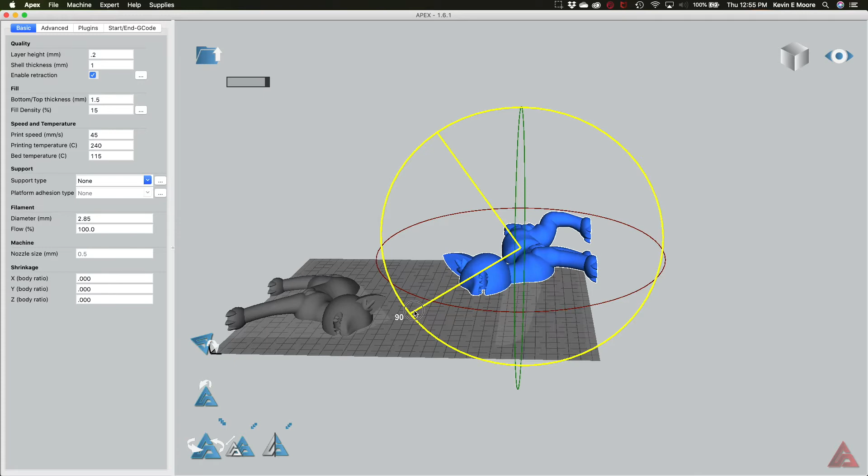And then we're going to do the same, rotate it 90 degrees. Okay? And then we will click and move these around together so that they both turn the optimal color for knowing that they're fitting on the build plate.

And then I'm actually going to rotate them a little bit to make them closer together, just so that they don't have to go so far from one another in order to make its travel moves. Okay.

So there we go, we've got both objects on there. And then we want to always make sure that we have supports on.

So if I click on support type, nothing's happening, but weird with the Mac software. If I maximize this, come down here, click on Apex, and then click on this and go touching everywhere. Over here, we'll go to overhang angle.

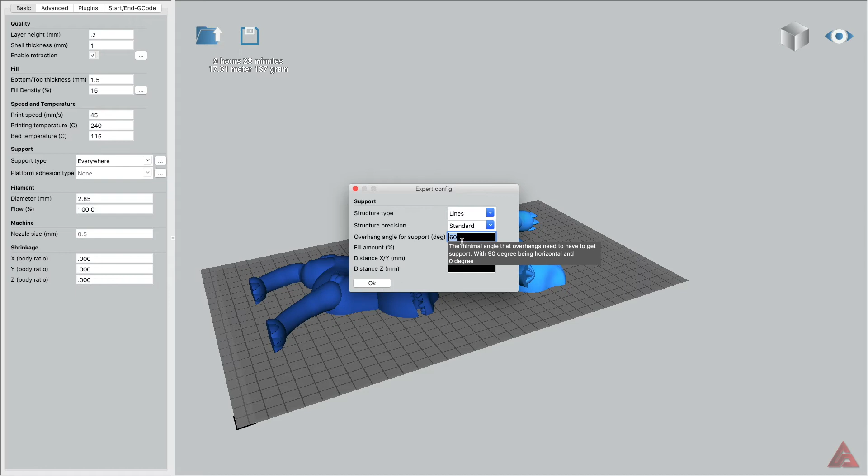Mine's in dark mode, so that messes this up too. The software is a little glitchy, but I can have this, 45 is a sure thing, but I leave mine at 60 usually, and it comes out all right. Just depends on the print, but 45 is a sure thing. And that's the degree of the angle that's going to get the support structure.

Okay, so now let's look at it in the layer mode, just to check everything, making sure it looks okay. So if I scroll through all this...

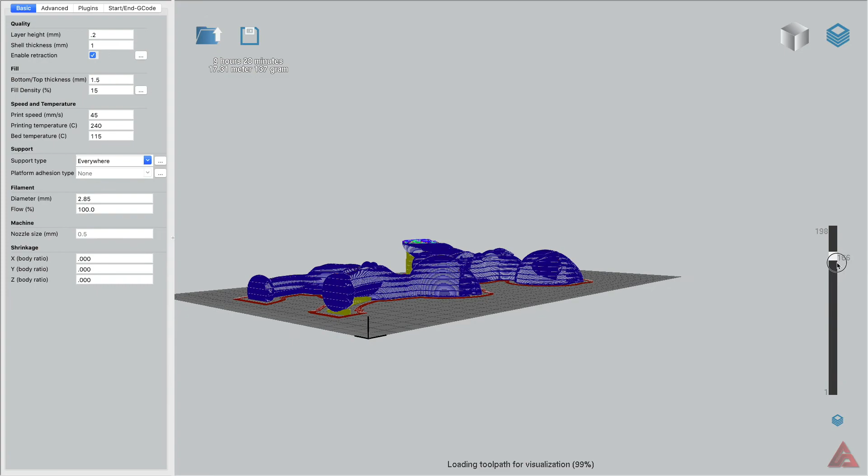Most of this is on the video of how to print with the Apex software, but it's good to go over it again. So you can see the yellow here is going to be our support structure, and we go all the way down to the bottom layer.

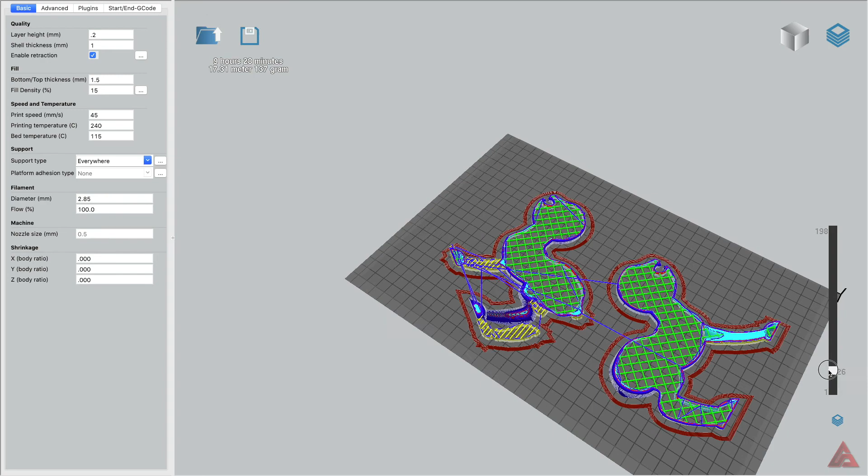Every time we always want to go to the bottom layer just to make sure we've got a nice solid bottom pattern, which it looks like we do.

And then we're also looking at the honeycomb pattern. Can we get away with making it thinner, or is it the optimal density? And I think with this one, it's pretty good. I mean, I might be able to get away with making it 12 or something like that.

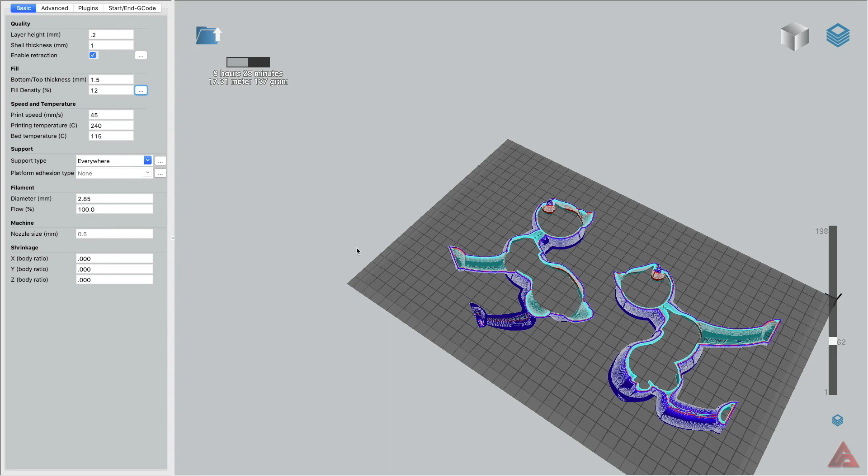So 12 will give it a little bit quicker print time. And change this to 1.25. So we're cutting off a little bit of time.

So I think this is probably going to be what we want for our printing purposes. This is good settings, it looks like. And we're ready to go ahead and start our print.

So then after this goes all the way across, it tells us we've got 8 hours and 39 minutes, and we'll go to Save Toolpath.

Save it as cat, just cat, or whatever you want to save it as, so that it makes sense. A shorter file name is always better, because I can see it on the display on the 3D printer easier. So click on save, and that's ready to just put on a thumb drive or the micro SD card that goes into the 3D printer and print.

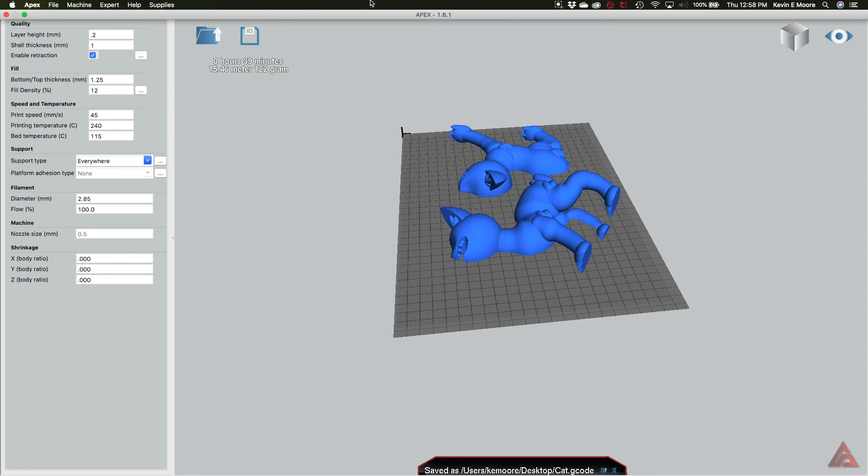And that is it for cutting your objects to make a cleaner 3D print.